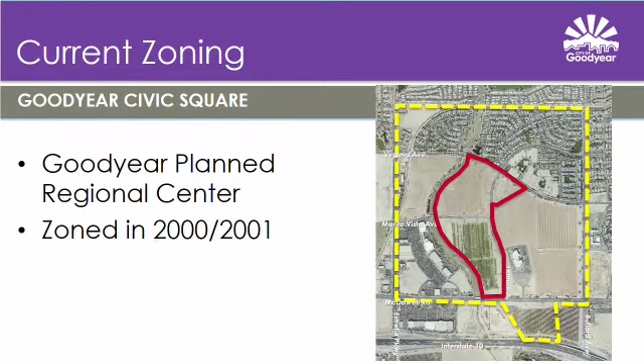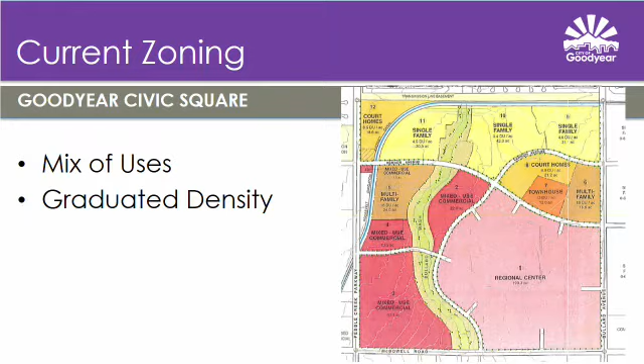This is the land use plan that was in the original 2000-2001 PAD. It includes a mix of uses and that graduated density concept we discussed at the work session, having single-family residential to the more north part of the property near the existing single-family to the north, and then getting denser as it gets closer to the commercial uses.

This is what the land use plan looks like today. As you can tell, there were some changes to the roadways. There have been some amendments over the years to the PAD zoning.

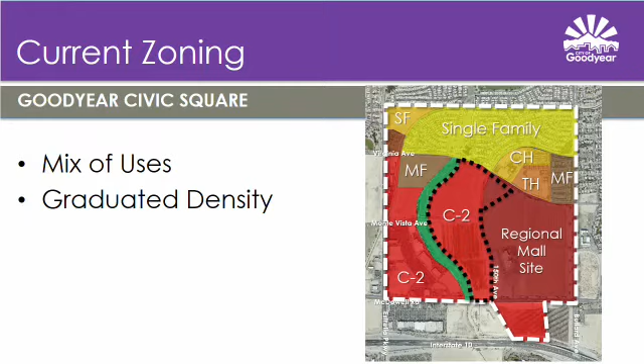The PAD zoning does designate most of the property as mixed-use commercial, but the PAD does include a specific permitted use list and development regulations that are in the PAD itself.

When we were first approached to consider rezoning the property, we did see it as an opportunity. I just wanted to point out that since we are going through a rezoning, it was zoned almost 20 years ago, and there are a lot of uses that are listed that, you know, maybe we wouldn't want to see so close to some of the residential uses that exist there today.

Just as an example, automotive sales, car washes, I'm not sure what custom manufacturing is, but those are permitted uses. And then there are additional uses that are permitted by use permit. So this was an opportunity to look at those permitted uses and see what does make sense adjacent to the existing residential neighborhoods, besides going through the zoning for the Goodyear Civic Square.

The general plan does designate it as business and commerce. Residential uses are permitted as long as they're 12 dwelling units per acre or more. And then there is that village center and transit-oriented development overlay as well, which encourages mixed-use development, walkable destination places at this site.

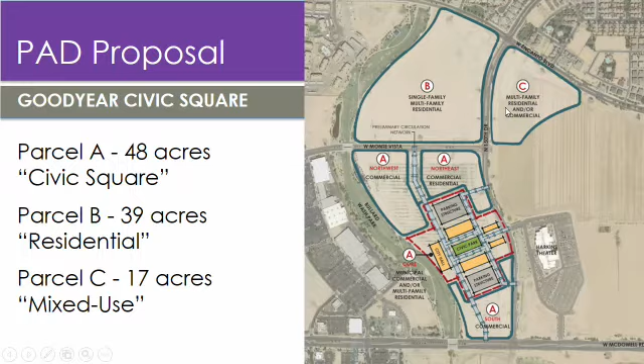To drill down into the uses and development standards a little more, parcel A is kind of divided into 2 areas, the core area, which is the Civic Square itself, and then the area outside the core. In the core area, there's a mix of retail, office, entertainment, restaurant uses that are permitted. Residential is permitted, but not on the first floor.

There is an extensive list of prohibited uses, some like mini storage, certain auto-oriented uses. There could be a car showroom, but not a traditional large car lot. Smoke shops, tattoos, those types of uses are specifically prohibited.

In the core area, they can go up to a height of 150 feet. There's also some concepts we don't usually see, like a height minimum. In most of the core area, there's a 40-foot height minimum; however, it's 20 feet within 150 feet of 150th Drive.

So we went through some of that concept in the work session, the wedding cake concept, so that these buildings along 150th can be a little shorter, and then they get a little taller, and then the City Hall being the tallest. There are also restrictions that the parking structures can't be taller than the office or mixed-use buildings next to them, so the parking structures are hopefully a little hidden when you're at the Civic Square itself.

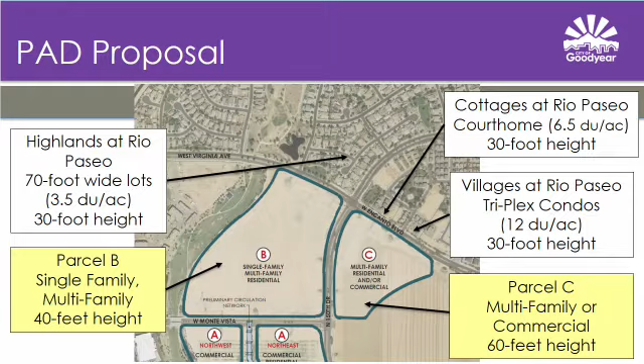We do have a preliminary plat in for review for the residential parcel. The zoning does not include this, so they're not stipulated to develop exactly to this plan, but we thought it was important to share some of the thoughts and plans for the residential parcel that we know of. You'll be seeing the preliminary plat for this development at a future commission meeting. We've worked very closely with the applicant on this plan.

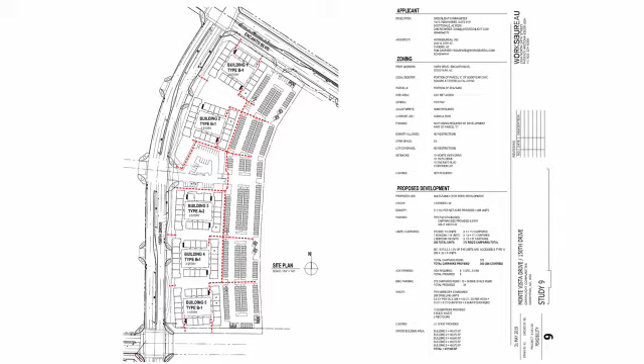So that if you live in some of those neighborhoods to the north, it's more pleasant to walk down to the Civic Square. They've worked with us a lot to rearrange their plans so it could fit the design standards for the Civic Square. This is a conceptual elevation, and again, these aren't tied to the zoning, but we wanted to share what we're seeing possibly developing on these parcels - a traditional apartment style development.

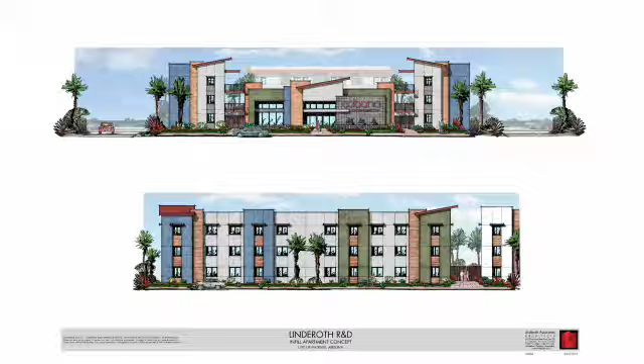We did have a neighborhood meeting on June 5th with approximately 14 residents. Generally there was support for the civic and commercial uses, but there was opposition noted to the multifamily. What we heard was concern about increased crime and traffic, and potential impacts to schools and amenities with bringing more people in - that parks and restaurants would become more overcrowded.

However, as I stated in the previous slide, staff has found that this proposal is consistent with the general plan, not only in the land use plan, but as we said in the work session, and also in the goals and objectives to create unique places, expand our parks, and create gathering places. It meets the zoning ordinance review criteria, and so staff recommends approval.

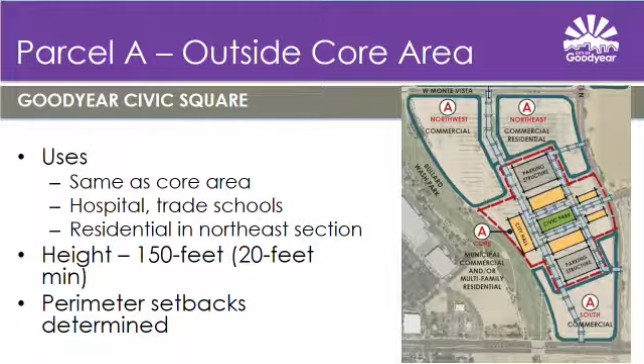Okay, thank you. Anyone else? I do have one question. Can you go back to parcel B with the detail that showed that one right there, so one of the options. So I understand we have single family detached on the north end, and then the density increases as you get closer to the city center, which makes a lot of sense. But does what we're doing tonight ensure that the north part will be single family? To make sure that somebody doesn't put high density residential throughout this entire thing?

Thank you. The PAD does not require that north part to be single family. So the zoning would allow for a variety of residential uses. Okay.

I'm wondering if it would be wise to make it so. But I'm getting ahead of myself, because that's the part where we discussed this between the commission members.

But Mr. Chairman, if I may, as Katie pointed out, we do have plats in process for this property as well. If it is something that the commission felt like needed to have some greater certainty, it's certainly within your purview to stipulate it to be substantially similar with the plats that are currently in.

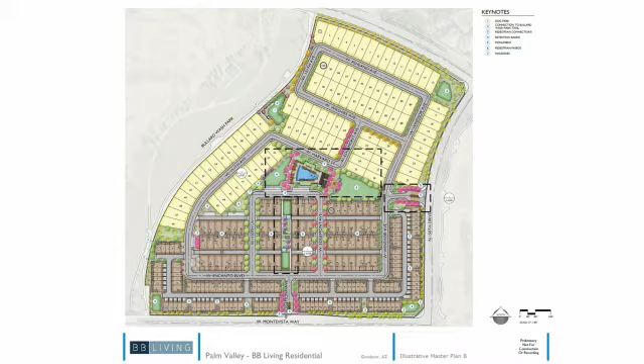I guess I do have a question. Does staff have any concern that the yellow area, which is the single-family housing, would become apartment or more densely populated housing?

I'll say at this point in time, we do not have that concern. We have plats in, so there's been a significant investment from the developer in order to advance the construction of the project and so forth. I'll also defer, and maybe Mr. Bull can allude to the progress of this parcel when he comes up to address the commission. He probably has a little bit more detail than I do, but at this point in time, we don't have any reservations that it would be anything different than what you're seeing.

So, Ed, correct me if I'm wrong, this plat is going to come before the commission, so we would get a chance to see this layout before we recommended approval or denial. Of this plat, yes, sir, Mr. Vice Chairman. And it would also, preliminary plats also go to the city council.

So if somebody came in with just solid high density and we didn't think that was a good idea, we would have the opportunity to recommend that not be approved. Perfect. Okay. Thank you. Any more questions for staff?

All right, very good. Would the applicant like to speak? Mr. Bull, how are you? Good, thank you, Mr. Chairman. Ed Bull, 702 East Osborn.